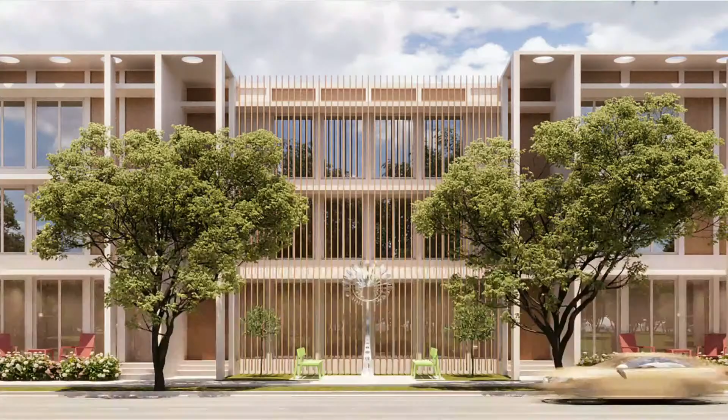There is one slide that you would probably want to see, which is the artwork, which is kind of like the idea I have. This is close up to the artwork and civic area. And this is the rear where the pools are and the back porches and the courtyard.

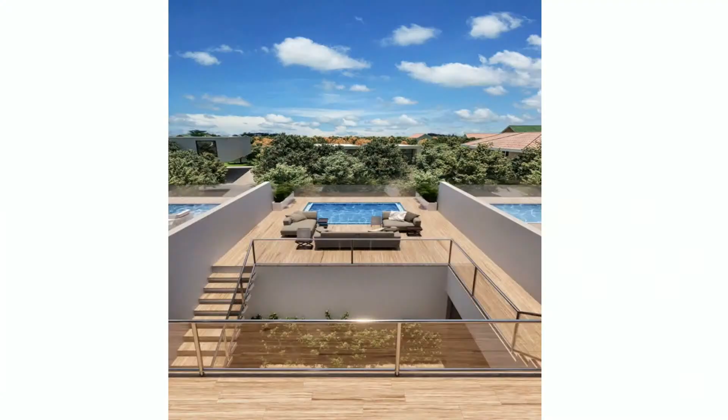Control. I think if you hold down Control, Julian, it'll create the...

So this is kind of like what I have in mind when you asked me about what kind of art I thought we should have in the front, and I thought it should be something interactive. So this is something that I'd like to pursue as the artwork for the civic space.

Okay, I guess we had enough. And that's my presentation.

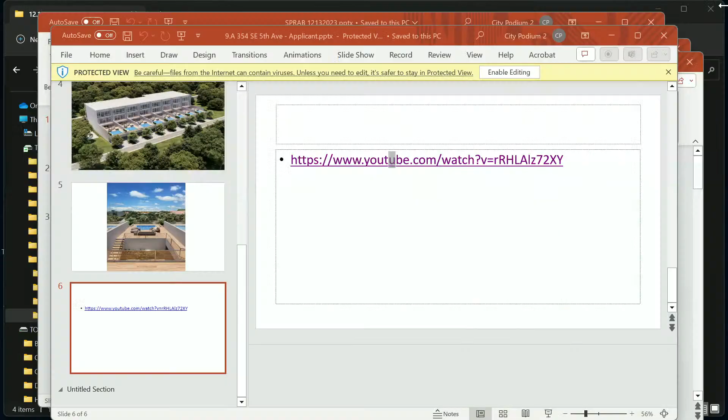Thank you. All right, Mr. Godonic. Chair, I just also want to remind the board that the artwork itself is not part of the board's purview. That would be something that would go to the art advisory board. So its location, how that functions with the site, those things might be within the purview, but the actual art itself will be governed by that board.

Okay, hello again, board members. Julian Godanic, Senior Planner. Before you at this time is the Level 3 site plan application for 354 Southeast 5th Avenue. To most of you, you'd be familiar with this project. You've already heard this item at a previous board meeting, given direction to the applicant. The applicant is now back before you with material that they believe addresses your previous direction.

I'm just going to go into the specifics real quick for a refresher and for our board member who has not yet heard this project. So, location is on Southeast 5th Avenue, 354 Southeast 5th Avenue. It's currently a vacant lot. The land use designation is commercial core, and the zoning district is CBD, Central Business District, Central Core Sub-District.

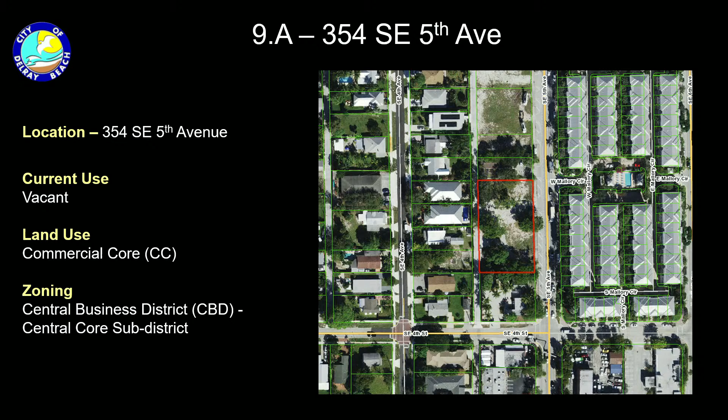These are the surrounding properties for some context. To the east, across from 5th Ave, you have the Mallory Square townhouses, I believe it's called, and then you have the sort of low-scale, originally single-family home. I believe it's now a commercial use to the south of this property, and then to the north is a vacant lot that has a site plan approval for a 4-story mixed-use development on that site, which is here before you, if you recall that project that was recently approved.

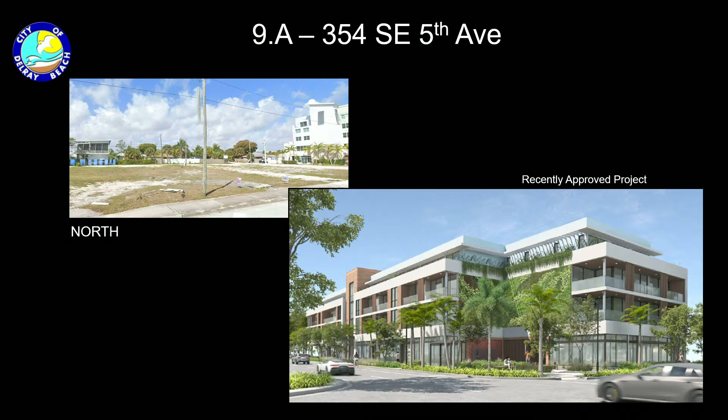This is the subject property, looking kind of to the northwest. And then before you, again, is the Class 5, for the 8 townhouses site plan, landscape plan, and architectural elevations, as well as a landscape waiver.

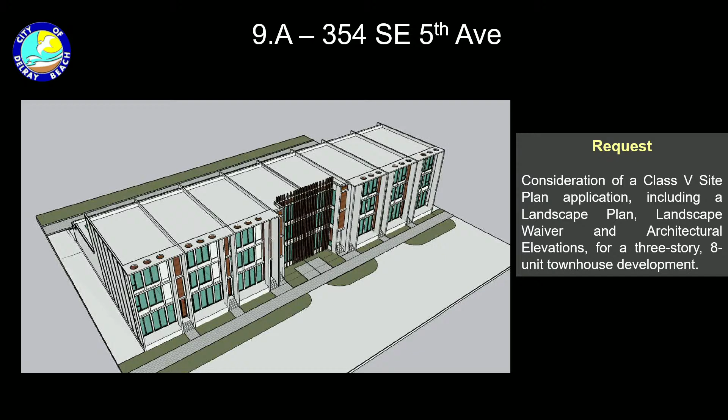These are the previous renderings. I chose to leave the previous ones and then intermix the new ones so that you can see the comparison and evaluate if you feel the applicant has addressed your concerns with the visuals.

Some background: the subject property consists of 4 originally platted lots, unified under the same deed, all of which currently sit vacant. SPRAB considered previous waiver requests for the subject property, but those waiver requests are no longer being pursued. Those were CBD waiver requests.

There is a remaining waiver, a landscape code waiver, still up for consideration, but the three waivers which SPRAB recommended denial of have been removed from the project, and the scope has been modified to no longer rely on that relief.

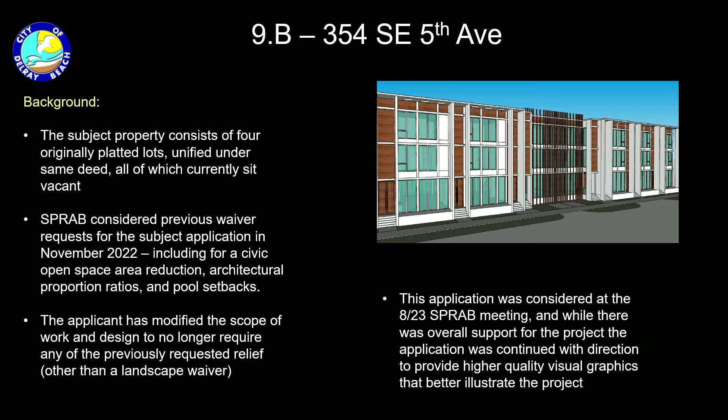This was held before you at the 8/23 SPRAB meeting. You gave specific direction for better quality visuals that represented the project more clearly, and the applicant has updated the renderings to hopefully do that.

Looking at the site plan, it's 8 townhouses in groups of 3, then 2 central townhouses further recessed where the civic open space is at the central portion of the site, and then 3 more to the south. They generally reflect the same floor plan, with a living area that leads to an interior courtyard and then the garage at the rear.

The garage and all vehicle access is off of the alley, which is the preferred design because it allows the Fifth Avenue streetscape to be reserved exclusively for pedestrian accessibility, which helps reinforce the public realm and makes it a more pleasant pedestrian experience. There are also street trees lining Fifth Avenue to further reinforce the quality of that experience.

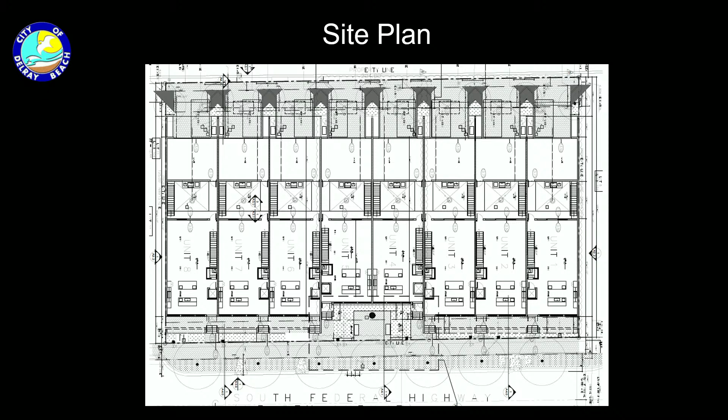Some more data: again, 8 units, 3 stories in height. Overall, the density proposed is 17 dwelling units per acre, which is well below the maximum threshold. They could go up to 30 dwelling units per acre, so it's about half as dense as it could be.

Each unit has a pool above the garage. Again, vehicle access as well as trash pickup occur from the alley, which is where we would prefer to see it.

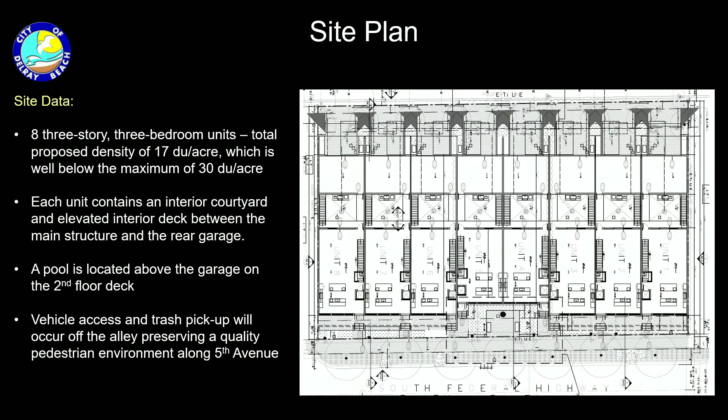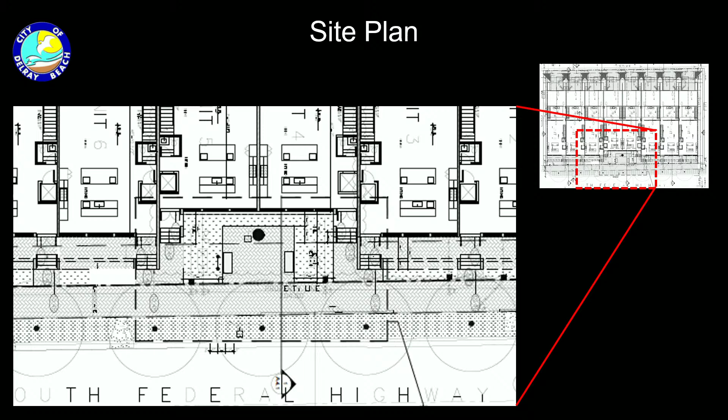Zooming in on the civic open space at the front and center portion of the site, the applicant has shown their intended vision, subject to approval of the Public Arts Advisory Board. There are two stoop entrances of units 4 and 5 that frame the edge of the civic space. There's landscaping, a public art feature, and other amenities and street furniture like benches and bike racks provided within this area. It does meet the minimum requirement for civic open space per CBD code.

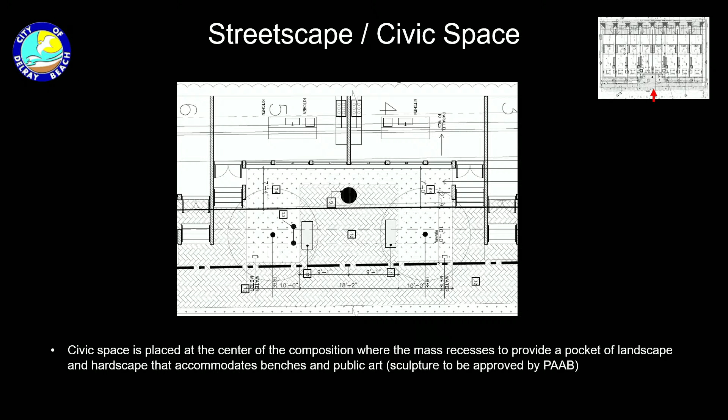Again, this is just looking at it in a bit more detail, blown up. You can see the elements that are proposed.

This gives a side perspective of the streetscape and how the building integrates with the public realm. Each unit has a raised porch, which projects 8 feet into the main front setback, the maximum allowed. The porch has an elevated wall, with ground planting in front of that, and vertical columns that extend the full vertical length of the building upward through the 3 stories, framing the porch.

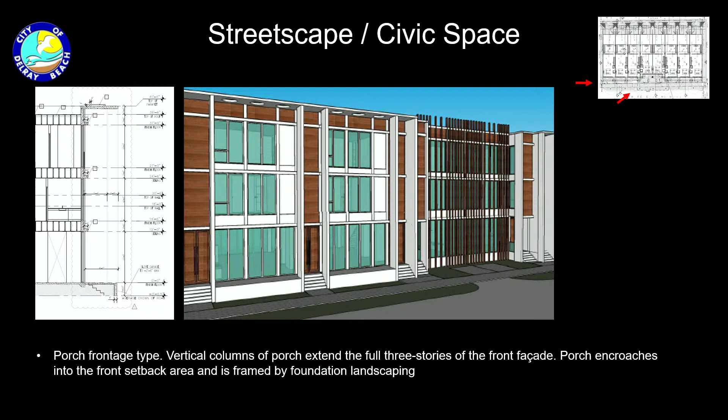This is showing it in the updated renderings.

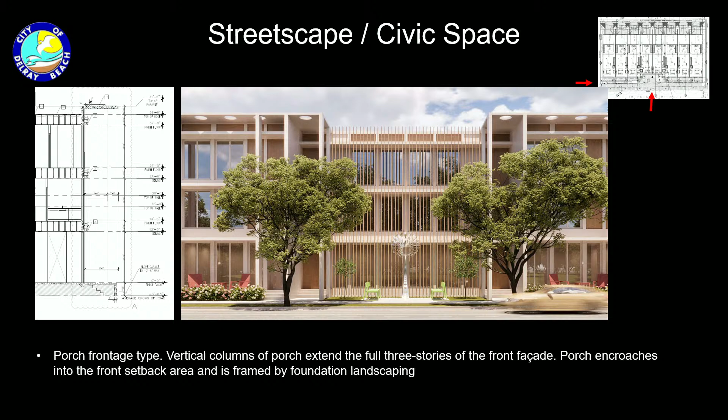They're providing their minimum streetscape requirements. They have a curb zone where the street trees and landscaping are provided that exceeds the minimum. They are providing an 8-foot pedestrian clear zone, which exceeds the minimum, and the remaining front setback is programmed with a combination of that porch encroachment as well as ground foundation landscaping and bicycle racks at the south edge.

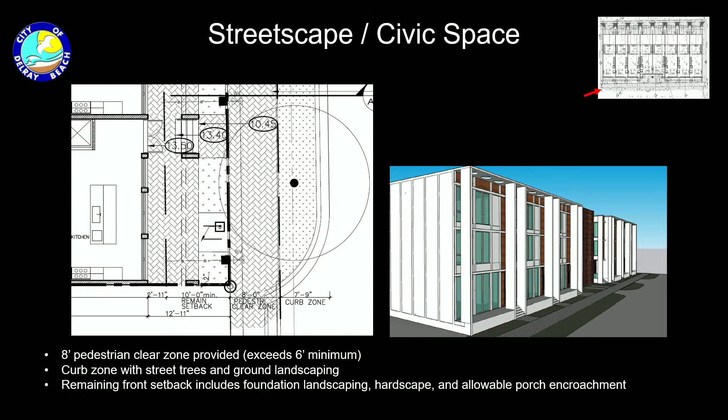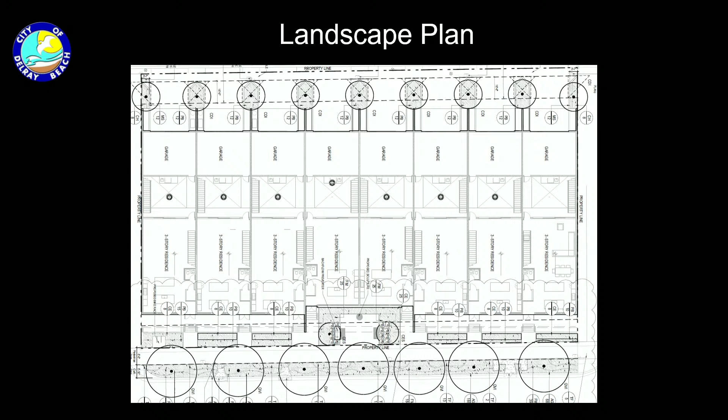Specifically regarding the waiver, code requires that adjacent to vehicular use area, or between vehicular use area and adjacent property lines, there be a landscape strip of a minimum of 5 feet with a hedge of at least 2 feet in height.

Because of the room available, the applicant is not able to accommodate the full 5 feet. They're proposing 3 feet 7 inches, but within that space they are still providing the required ground cover at 2 feet in height plus shade trees. So while the physical space is less than required, they are still providing the landscaping elements that are supposed to go into that space.

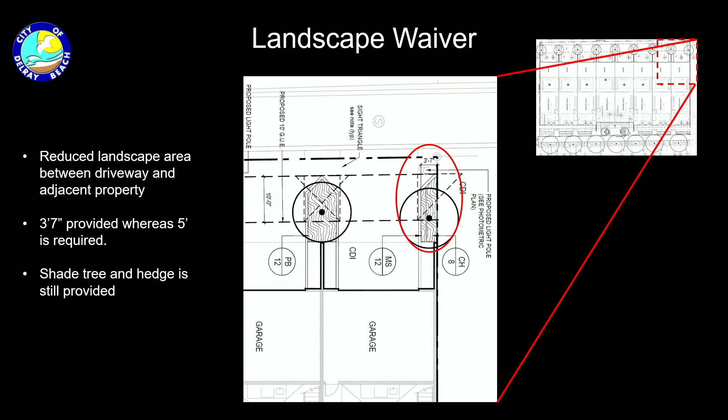Moving on to the design, it's a masonry modern architectural style. It's a sort of unique and interesting interpretation of that. It's a bit different than some of the masonry modern we see, which is appreciated, that it's taken in a bit of a different direction.

There's lots of glass coverage on the facade. Materials include smooth stucco as well as a teak finished wood accent. It's very vertically proportioned, and it preserves the sense of feeling carved out of a single mass, which is an important aspect of the masonry modern architectural style.

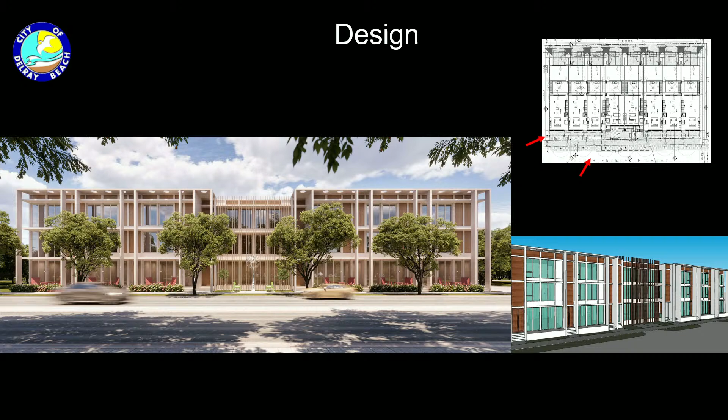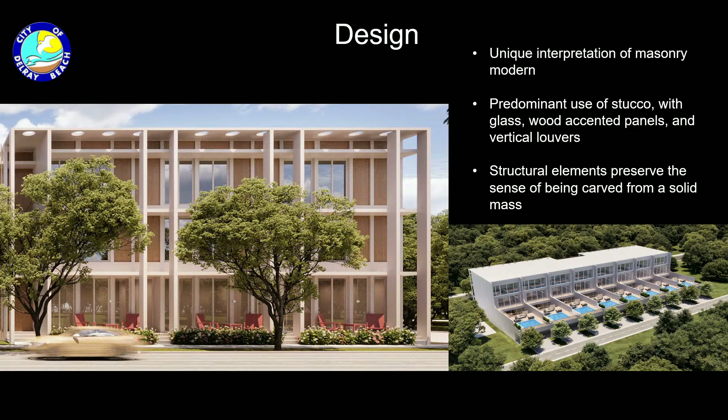So just some other perspectives, and this reiterates what I just said. And then these are the black and white elevations, for reference.

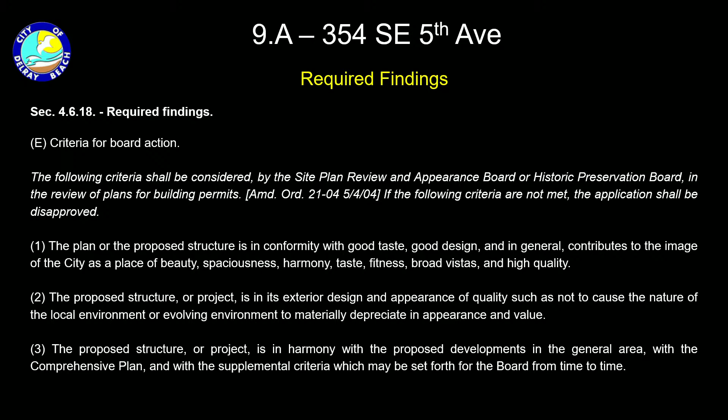So your required findings for architectural elevations, it's 4618. The requirements were detailed in the staff report.

For site plan action, you have consistency with 311, which is consistency with the land use map, concurrency with the comprehensive plan, and concurrency evaluations with respect to trash, drainage, schools, parks, etc. They will be required to pay all applicable impact fees, including 500 per unit for parks, and compliance with the LDRs. Again, all of that is further detailed in the staff report.

SPRAB has the authority to approve landscape waivers, so it does not require approval of the City Commission. You can approve that with your site plan action.

This is your board options moving forward. You can move approval, you can move approval as amended, you can move denial, or you can move to continue with direction again, if you so choose. I'm happy to answer any questions.

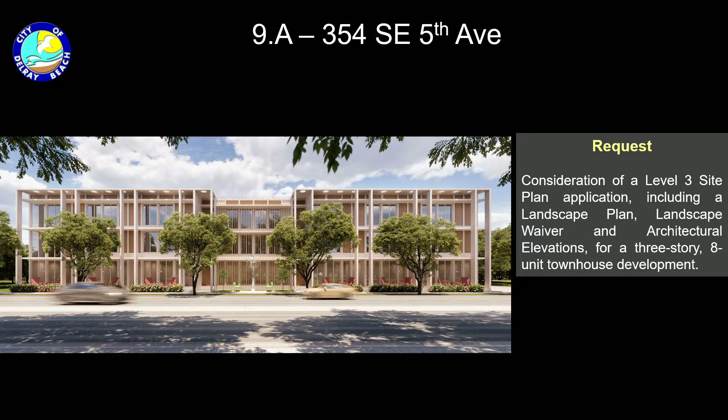Thank you. Is there anyone from the public who wishes to speak on this item? All right, seeing and hearing none.

Mr. Silverstein, do you have any rebuttal from Mr. Godonic's presentation? No, I think Julian did a great job. Okay, any further comments or rebuttal? None from me. Okay, all right, so now we're at board comment.

So Ms. Pardo, if you'd like to begin, please. First of all, thank you for coming back and listening to what we suggested. I just need a clarification on this rendering. To me anyway, it looks like it's a different landscape than the plans as far as the number of trees in the front. Is that just...

So typically we don't refer to renderings for a like-for-like example of what the landscape plans actually show. Usually it's just for illustrative purposes. So what is on the landscape plan is what they would be required to do. That's what we're voting on, correct. The rendering is just a visual aid, but you're not approving the landscaping on the rendering. Okay, all right, thank you.

Okay, I think it's an improvement. All right, thank you. Mr. Cohen? No, I don't have any comments. I think it's a beautiful, beautiful project. All right, thank you. Ms. Gray? No comments. All right.

And Mr. Nelson? No comments, other than good luck with the art installation. I think that was cool. Thanks. All right, I agree.

Thank you so much for coming back. Welcome, and we appreciate your talent and working in Delray and the improvements to the city as we develop it. So I have no further comments. It should be a great project.

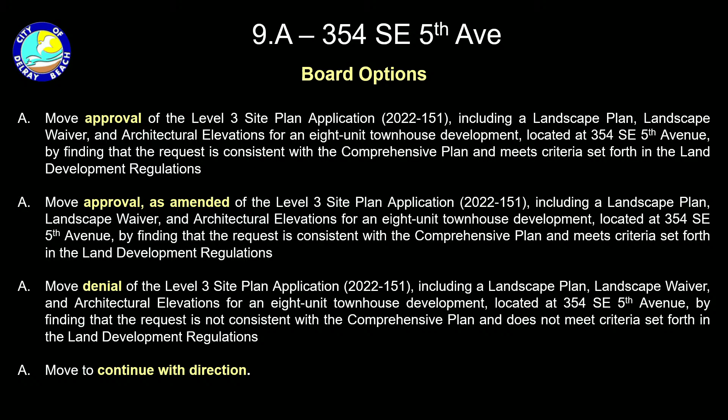And a second, please. I'll second. Okay, thank you. That's Mr. Nelson. And Rochelle, when you're ready, if you can please call roll.

Sure. Keith Beal is absent. Stephen Cohen? Yes. Linda Perdeau? Yes. Annette Gray? No. Adam Nelson? Yes. Jose Alvarez stepped down. Dana Adler? Yes. Okay, congratulations, you've been approved.

Thank you, thank you. Just so you know, this is going to be the last time I will be here. I will no longer be doing projects of this size. Oh, wow. I'm cutting down my workload. I'm traveling more, enjoying my grandchildren. So it's been a pleasure. All right, thank you so much.

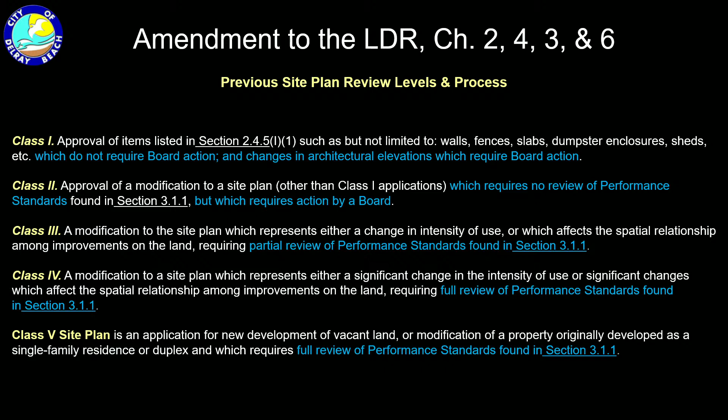So the levels are like the 5 classes we had before. Now there are 4 levels, no more classes. Level 1 is an application that meets all LDR, all land development regulations, and has no building area increase. This could be landscape, hardscape, architectural elevations, material and color — no added built up area, and it meets the regulations. So level 1 is eligible for administrative approval by staff.

Level 2 also is an application that meets all the regulations, but it has a threshold of 5 units or less if residential, or less than 15,000 square feet of mixed use or non-residential development. Level 2 is also eligible for administrative approval, but it will have to go into the City Commission appealable report. Any appeal to level 1 and 2 has to come to SPRAB.

So if staff made a decision to deny, for example, an application that is level 1 or 2, the applicant can appeal to the SPRAB board without any associated landscape or parking, just the appeal. So the applicant can appeal staff decisions in front of the board, and if the applicant doesn't agree with our decision, they can still appeal it to the commission.